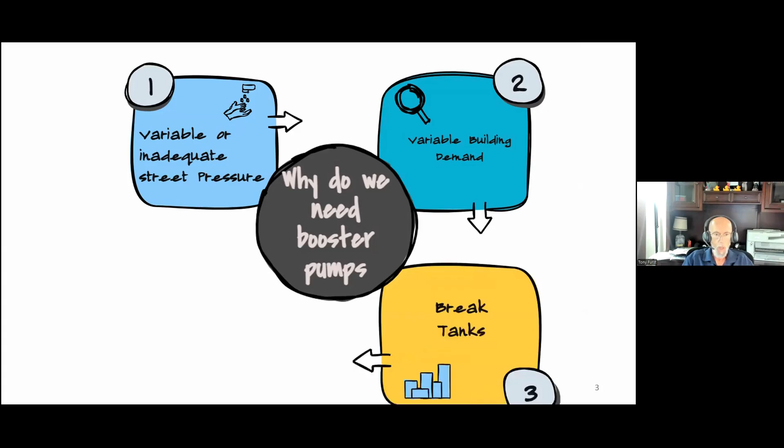We also have, depending on the part of the country we're in, break tanks. The city water comes into the building, goes into a tank, kind of like a cistern used to be when we had cisterns on farms and people's houses. And that break tank holds the water, and then we pump out of the break tank out to the building. That break tank provides a break between the building water system and the city water system, so they're not ever directly connected to one another.

And that's real common. There's a lot of them in New York City, Chicago, down in Texas. There's a lot of major municipalities that require break tanks between the city distribution system and the building's plumbing distribution system.

The other thing we have to think about is industrial process. And what do we do in an industrial process environment? So let's say it's a manufacturing plant and they use domestic water for parts cleaning.

Or in a food processing facility, they need higher pressure to do washdown. In animal processing facilities, things like that. So they may not have adequate pressure, and they need a higher pressure for whatever processes are going on inside the building. So you'd put a booster pump in to take care of that.

And then there's always irrigation. So y'all all know what a golf course is. Well, having a booster pump is how they may supply water to the irrigation system to keep the golf course looking good. So there's different places that we put booster pumps in buildings and in different applications. And all of it falls into this same category of domestic water booster pumps.

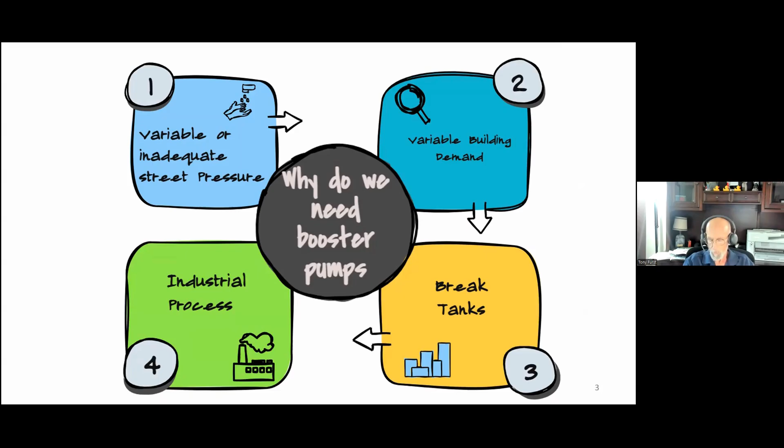So the challenge becomes, how do we decide what flow rate we need in a building? Well, between ASPE, which is the American Society of Plumbing Engineers, and ASHRAE, we have fixture units. Basically, we look at all of the different types of plumbing fixtures that are in a building, between water closets and urinals and lavatories and bathtubs and shower heads. There's all kinds of things within a building that water touches that we use and you don't really think about, but they all use different amounts of water.

And so if I look at a water closet, most of the time in a commercial building, that water closet has a flush valve on it. Okay. And that flush valve carries a weight of 10 fixture units. It's a way that we can take the number of devices in a building, assign a weight to them, and then take that value, once we know all the fixture units that are in a building, depending on whether it's flush valves or tank type toilets.

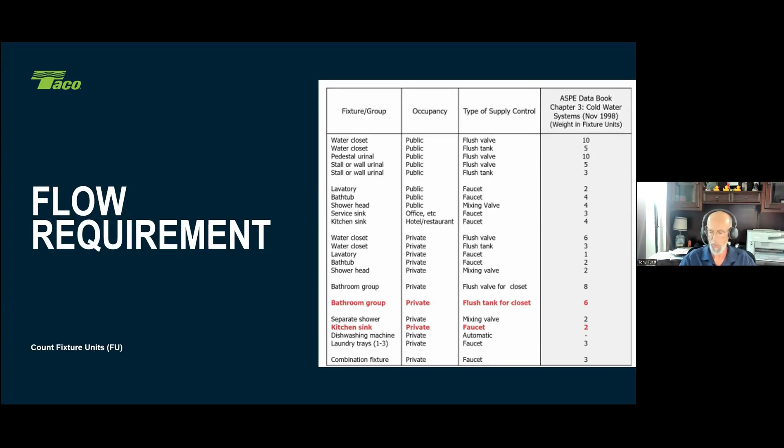Is it a private lavatory? Is it a public lavatory? Do we do it based on bathroom groups, which is typically what we do in houses, kitchens, all these different things. We add up all the fixture units in a building. And once we know the fixture units, then we can use Hunter's curve to determine how many gallons per minute we need to supply to the building.

So Hunter's curve was developed in 1940 by Dr. Roy Hunter. And Dr. Hunter basically created this statistical probability model for plumbing systems. It looks at the number of fixtures in a building, number of fixture units, and assigned a probability and a flow rate to each of those fixtures.

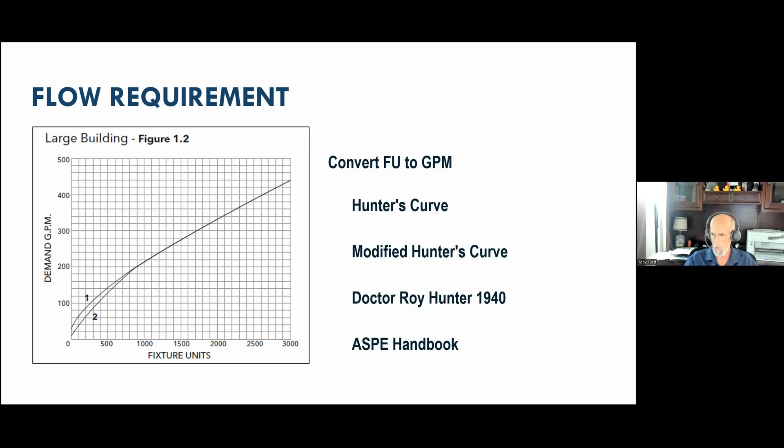And so we've used Hunter's curve to design plumbing distribution systems since 1940. It's part of the plumbing code. It's listed in every model plumbing code. It's in ASPE, it's in ASHRAE, and we've used it reliably for years and years. There's a problem with it though. When I look at Hunter's curve today, Hunter's curve gets blamed for being overly conservative. Why is that? Well, fixture flow rates have changed and fixture probabilities have changed.

So if I look at a high-rise apartment building and I think about what life was like in the 1940s and the 1950s, I understand that women didn't work out of the home in the 40s and 50s. They were stay-at-home moms. And kids went to school, they came home, everybody was in the house. It was only dad that was gone during the day. So water usage was different in the 40s and 50s and even into the 60s. We really didn't see a dramatic shift in building occupancy and building usage until into the 60s and 70s.

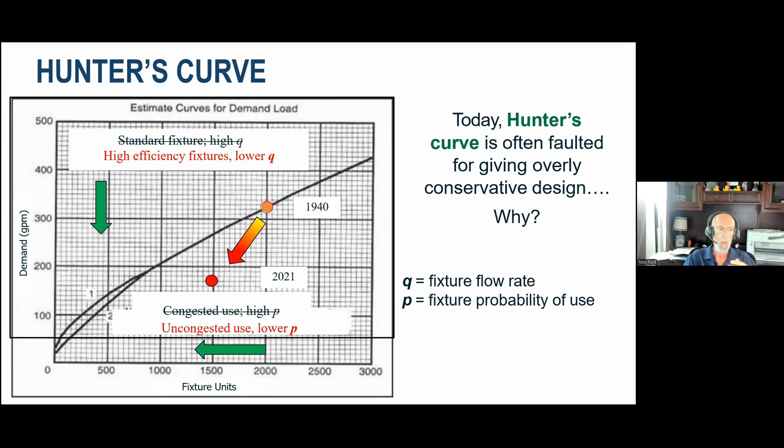So if we look at what's happened to water usage and what's really changed, this is a really good chart that kind of shows what's happened. In 1940, Hunter's curve was developed. And in 1940, to give you an idea, a toilet required 6 gallons of water to flush.

Well, in the 1980s, we started coming up with low flush toilets that used less water because we started to realize that water is a limited quantity. Granted, most of the earth is water, but there's only so much water on the planet. And climate change affects how much fresh water we have versus how much salt water we have.

And the water we're using today is the same water that the planet was using millions of years ago. It follows the water cycle. Water falls out of rain, it goes into the ground, gets used, evaporates, goes back up into the sky. It's just a continual cycle. We remember that we learned that way back in ninth grade earth science.

So in the 1980s, it was 5 gallons per flush for a toilet. Well, in 1987, ASHRAE realized that things were changing and that the industry was changing. And at that point, they came up with modified Hunter's curve, which started to adjust the flow rates within Hunter's curve for each fixture type. So you still counted fixtures and established fixture units and all that, but modified Hunter's curve also looked at different building types and realized that hospital usage and an apartment building and an office building all had different demand profiles and different usage profiles. So that's what modified Hunter's curve was about.

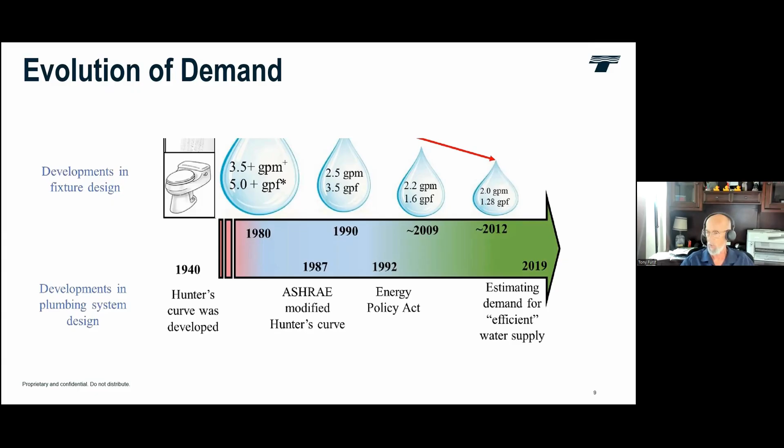And to that end, my good friends over at IAPMO, which is the International Association of Plumbing and Mechanical Officials, have created, in concert with a couple of different universities, the water demand calculator. And what the water demand calculator really does is it is a new probability index and flow rate index to take everything that we've learned over the years about Hunter's curve and put it into today's terms, into what's really happening in a building today. Because there's several things that we have to understand with this. When we use Hunter's curve and that determines a flow rate, well, that also determines a pipe size.

What we found is, and I'm sure everybody's heard about Legionella. There's a huge case going on in New York right now. They've had 60-some cases of Legionella disease and several deaths already. Now they've linked it back to cooling towers, but we have to understand Legionella occurs naturally in our water distribution system, even in municipal water.

What happens is when we oversize the plumbing system, that pipeline is bigger and we don't turn the water over as fast. If I have a 6-inch water main into the building, but I really only need a 3-inch water main, what that means is I don't clear that water main and replace the water in that pipeline as fast as I should. Okay, so that's part of the reason behind the water demand calculator, is really to look at understanding the demand profiles and how they've changed over the years and taking into account new high efficiency fixtures.

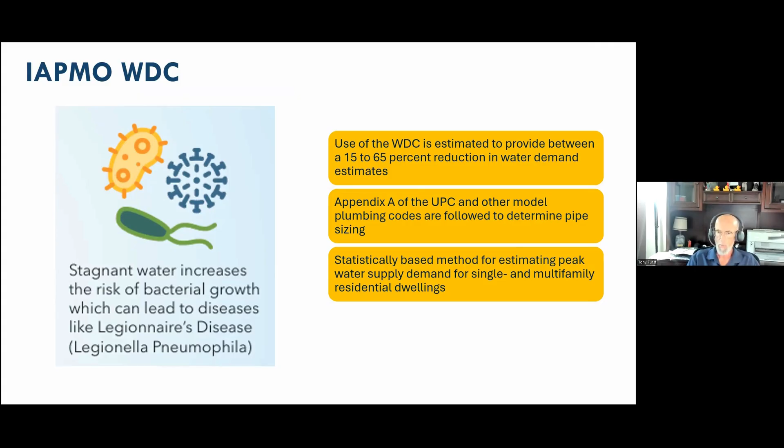So anyway, it's really still a statistically based method for estimating peak water supply demand. And right now it's focused on single and multifamily residential. It's available for download from the IAPMO website. It's a great tool to play with to get an understanding of the changes within the industry.

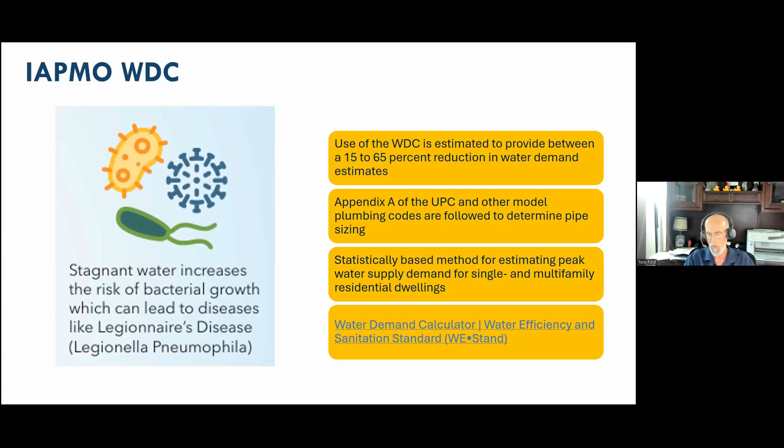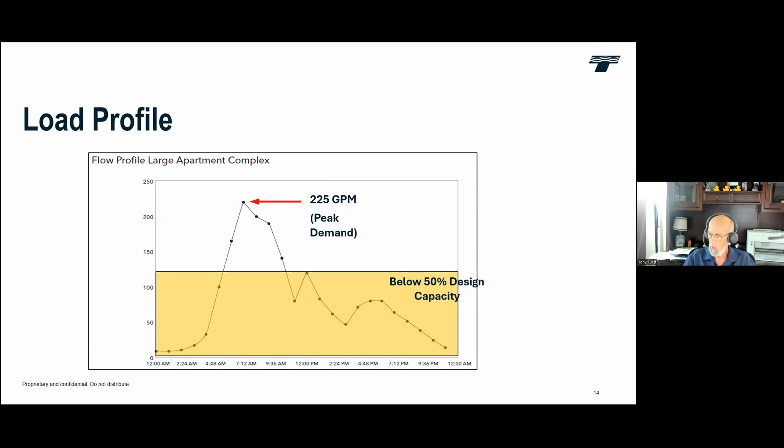And if we look at it, most of the time, that system was less than 50% of the maximum capacity. So at a very, very small percentage of the time did we ever get close to that peak demand. And what this tells us is that we really have to think about the booster pump, how we're selecting that booster pump and how many pumps we really need. It's understanding the variability in demand from minimum load to maximum load and how best to utilize our pumps.

So if we understand the building and all the different things that affect water demand in a building, we've got morning rush, people are getting ready, they're going to work, they're taking showers, they're getting ready to get out for the day. And then water demand drops off because everybody's gone, everybody's at work. Well, then we get another peak at lunchtime. People come home for lunch maybe, and so we see a little bit of a peak. And then we see another peak in the evening because people are coming home, making dinner, kids are coming home, all that kind of neat stuff. And then overnight, it drops off to nothing.

And you see some changes throughout the year, depending on whether it's summer or winter. A lot of people, dead of winter, it's super cold outside, they come home in the evening and they want to take a warm shower because they've been outside shoveling snow or out playing in the snow with the kids, things like that. So we see different changes in demand based on time of year.

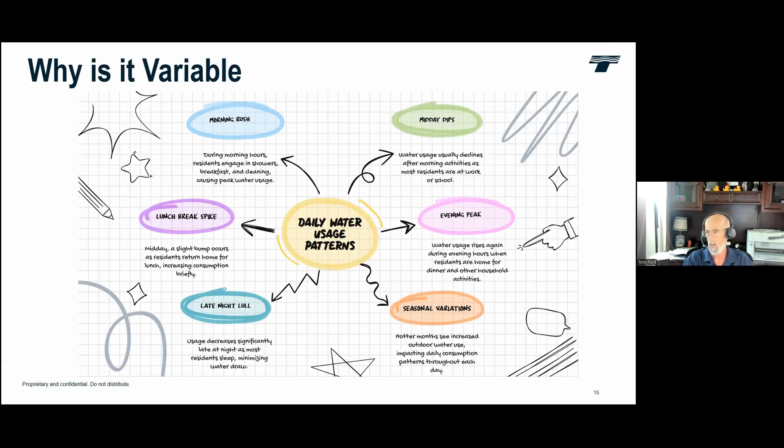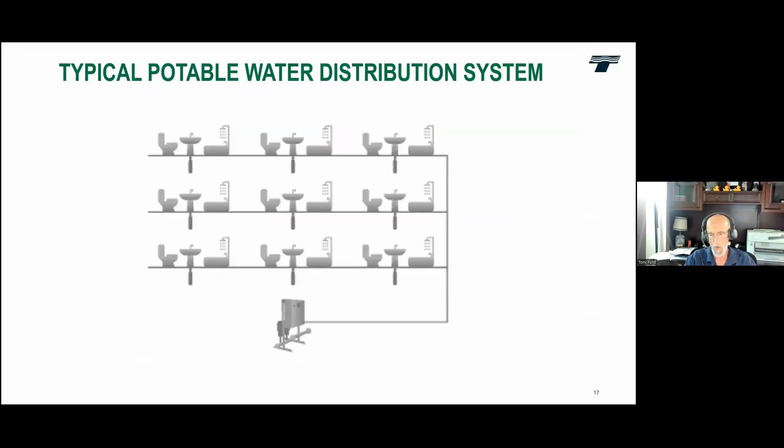So let's look at what we do with the water once we send it out of the booster pump and understand what's going on. So we look at a typical distribution system. We're going out of the booster pump, out to the floors of the building, and we're feeding all these bathroom groups. Pretty simple stuff. Well, how do we decide what kind of a booster pump we need? Well, first of all, we've got to figure out what the system requirements are. And that's really understanding Hunter's curve or the water demand calculator or some methodology to determine what our demand flow needs to be in the building.

Then we have to figure out what our suction pressure is, what the pressure coming in from the street is. And that's typically done with a hydrant flow test. In a hydrant flow test, we really want to know, if we're flowing fire hydrants in the case of a fire, what's the city pressure going to drop to in its worst case condition? Okay? Because I can't predict when there's going to be a fire. I have no way of knowing. So I've got to calculate my system demand based on that worst case condition. Okay. So now I know what my minimum suction pressure is.

Now I've got to figure out how high do I have to push the water in the building? Is it a 5-story building? A 10-story building? A 50-story building? That tells me what my elevation change is. Now that I know flow rate, I can figure out what pipe size I'm going to have, and this determines my friction loss. Friction loss is fairly minimal in a domestic water system. It's not like a chilled water or hot water system, so friction losses are a lot lower. But then I'm going to put safety margin in. And safety margin, as I tell people when I teach design classes, be very surgical and very mindful on adding safety margin.

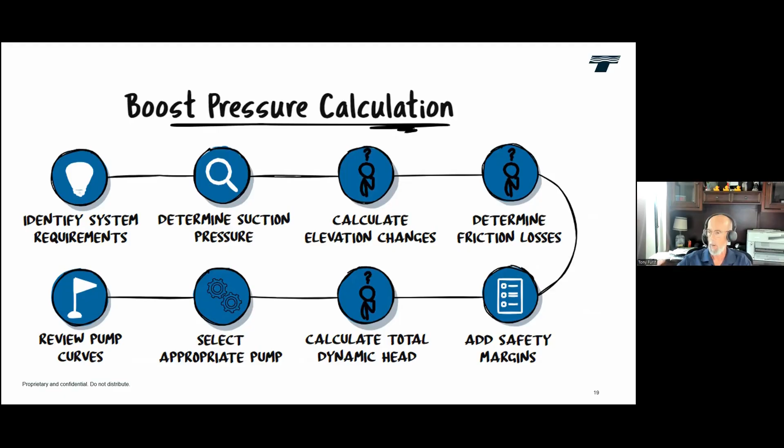Okay, so the way a booster pump is going to work is, I've got variable speed drives, I've got a pump controller, and then I've got my piping and my package losses, friction loss in the piping system, and all that kind of neat stuff. So I'm really concerned with the residual pressure at the highest point in the building, at the most remote fixture.

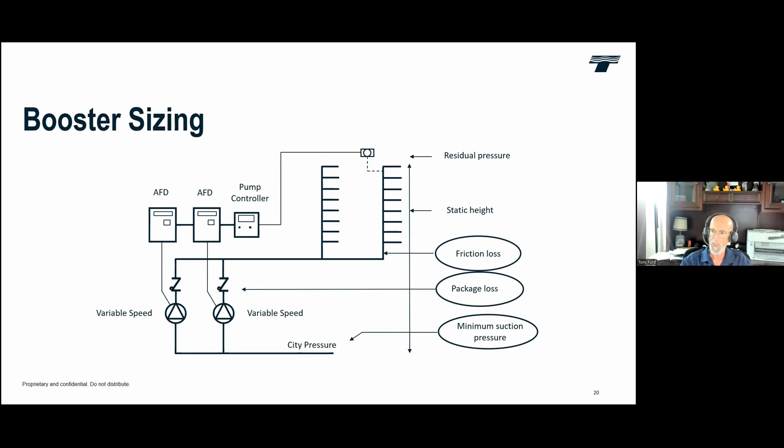So if you think about it, I've got a booster pump sitting down in the basement. I've got piping that goes out to the building, and I may have multiple risers, but generally, the booster's in one corner of the building, and I'm going to someplace at the opposite corner of the building. So I need to make sure that I have 25 psig in a residual condition, so flowing water at that most remote fixture. And so I've got to select my pump and control my pumps to maintain that 25 psig residual or 35 psig static under all conditions.

But for simplistic sake, we're just going to say that we've got a 20-pound loss. My 40 pounds is right ahead of the backflow preventer, not accounting for street losses. And so in this situation, now I'm going to have my 20 psi at the top of the building.

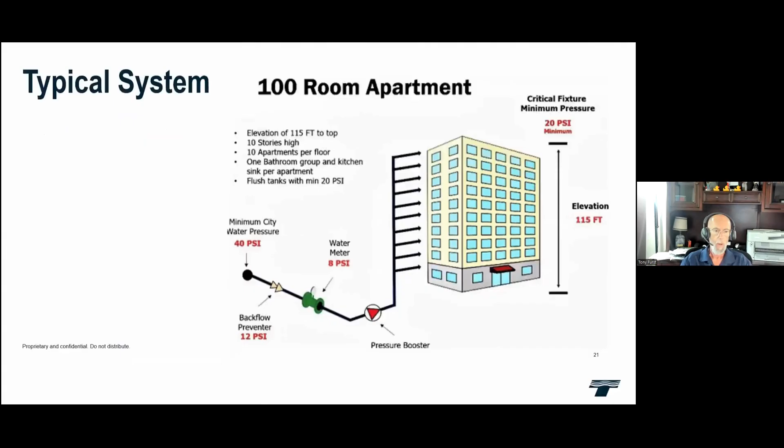Now, the way booster pumps work is we have two choices. I can either put a pressure transmitter all the way at the top at that most remote location, or I can have software built into the controller that means I can have a pressure transmitter on the booster skid, and it does the calculations and it understands friction loss and understands how it can reset the pressure based on demand at any point in time.

And all of us that build booster pumps, we all have our own little ways that we do this, but it's all based on the requirements of ASHRAE 90.1. And ASHRAE 90.1 says that we either have to have a remote pressure transmitter or we have to have software that emulates having that remote transmitter. And so that's what we all do. We have the ability to do either one. We can do the remote or we can do the software.

And it really depends on your building type as to which one is the best for your building. More simplistic buildings, software anticipation works really well. If it's a very, very complex building, hospitals are a really good example. Hospitals are fairly complex plumbing systems. I have found that a remote pressure transmitter can work better in a hospital situation because of the variability in how hospitals actually operate.

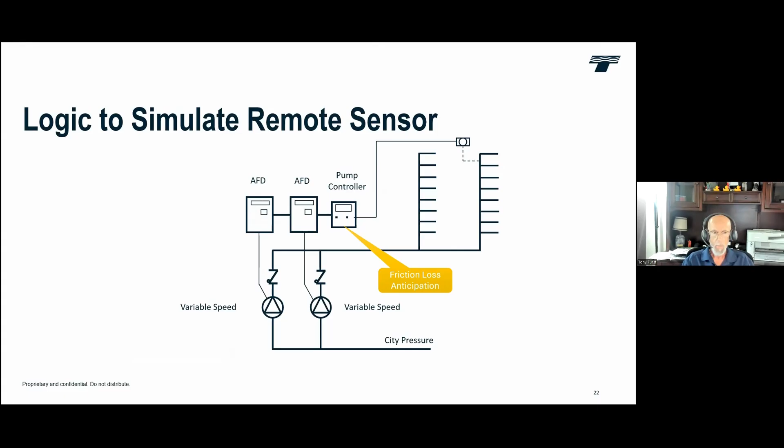So anyway, with that, we're kind of at the end of the slides, and now we can talk and answer questions. Awesome. Well, you can go ahead and take your presentation down, and I took lots of notes, so I'm excited to dig into some of these questions. I love your presentation. Cool. Thank you so much.

So it was very interesting with the flow requirements that you were talking about and the high efficiency fixtures. Before you got to that, that was a question ruminating for me of, how does that change with knowing that people are making sinks and faucets, the shower heads, all of that to be more energy efficient? So with the higher efficiency fixtures, which is decreasing the water demand, when you talked about the water demand calculator, is that really what people need to make sure that they look at in addition to the modified Hunter's curve?

Yeah, so it really depends on the building type that you're in. In a residential setting, it could be a condo, it could be an apartment building. It doesn't make any difference whether it's a high-rise condo building or a 200-unit, 3-story apartment building. It's still a residential structure. The water demand calculator works in that scenario really, really well. And IAPMO is working. There is a group at University of Cincinnati working very strongly on developing a water demand calculator for commercial applications.